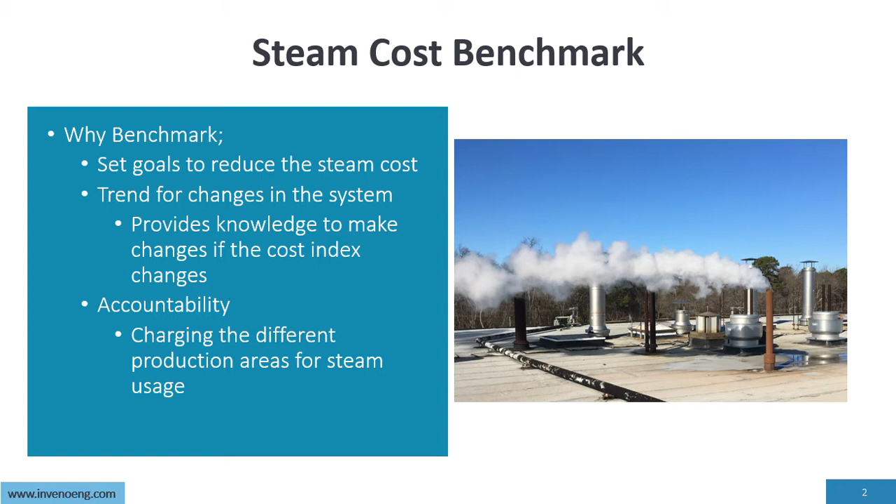Knowledge to all plant personnel. So it gives plant personnel knowledge. So if we go by this here venting to atmosphere, the plant personnel can put a cost to that. So this here is costing the plant roughly around $55,000 a year. But if we don't have a steam cost, then venting has no impact to the system.

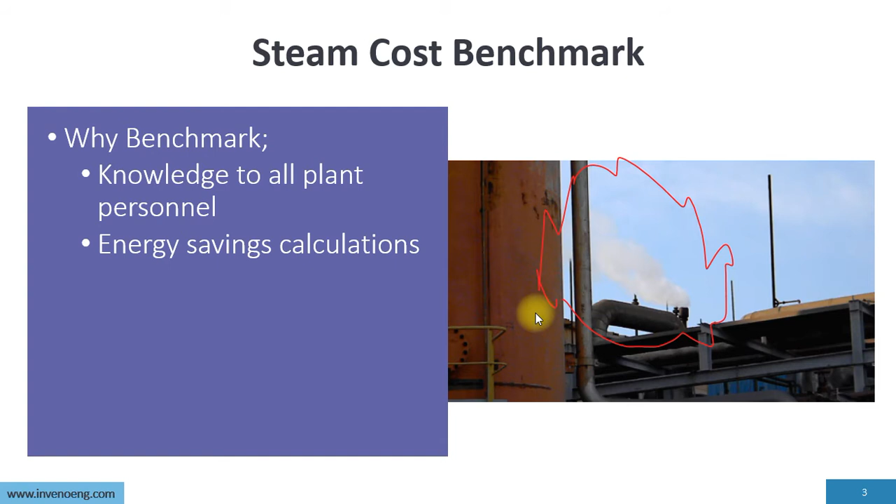And we need to understand energy saving calculations. So if we're going to implement and reduce the steam cost, what is the payback for that implementation? What affects the steam cost? Well, of course, fuel costs. If we get lower fuel costs, of course, it's going to provide a lower steam cost.

Operating steam pressure. Yeah, if we lower the steam pressure, it provides a lower steam cost, but it's not a significant amount, and we shouldn't be lowering steam pressure without looking at the boiler itself to make sure that we can lower the steam pressure without impacting the boiler operation. Also, we want to ensure the steam pressure is at the optimal steam pressure to meet the plant's process equipment.

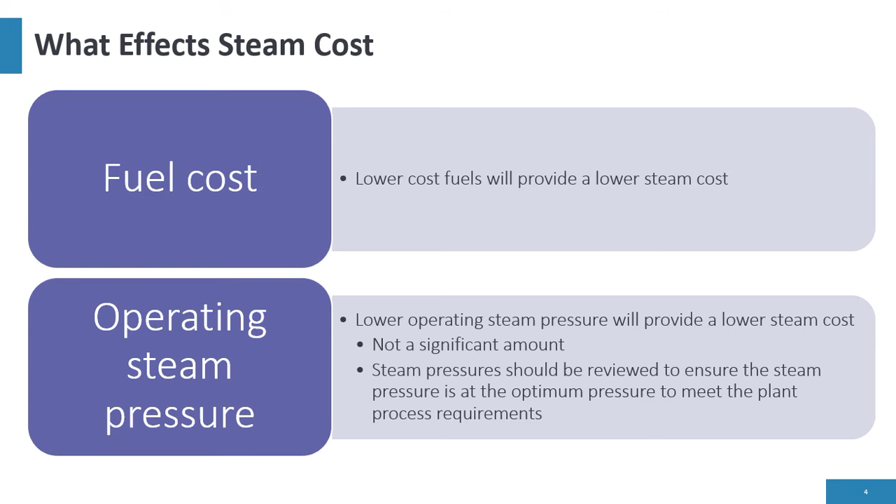Percentage of makeup or percentage of condensate return. The higher percentage of condensate return, the lower the steam cost. So if you bring back 95% condensate, your steam cost is going to be lower. If you bring back 10% condensate, your steam cost is going to be much higher.

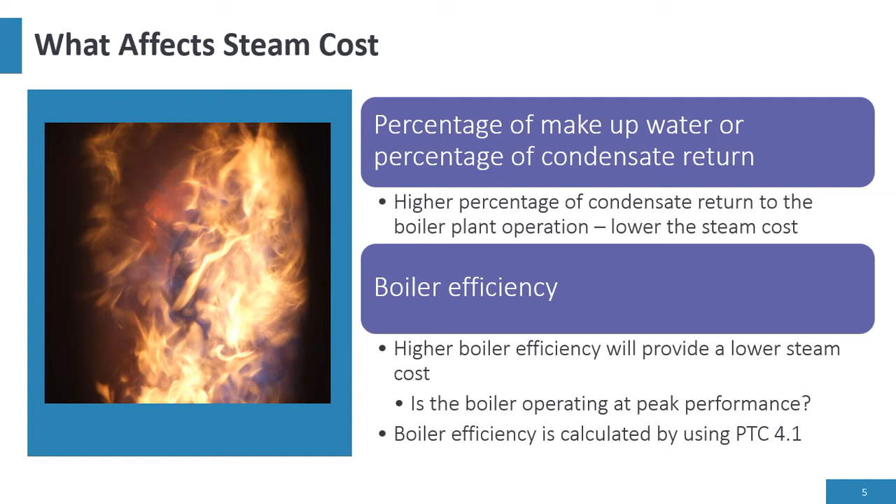The other thing is boiler efficiency. Higher boiler efficiency will provide a lower steam cost. Is the boiler operating at peak performance? Boiler efficiency is calculated per PTC 4.1. That's why it needs to have combustion testing of the boilers to make sure we're running at peak performance. And that should be done not once a year, it should be done every 3 months to make sure we're running at peak performance.

Loaded versus unloaded. When establishing a steam cost, it is important to determine the true cost of steam being used in a steam system. That's loaded cost. What is loaded steam cost and unloaded? Loaded steam cost has all operational costs, labor, capital projects, manpower, fuel costs, transportation, chemical costs, water costs, all the costs built into it.

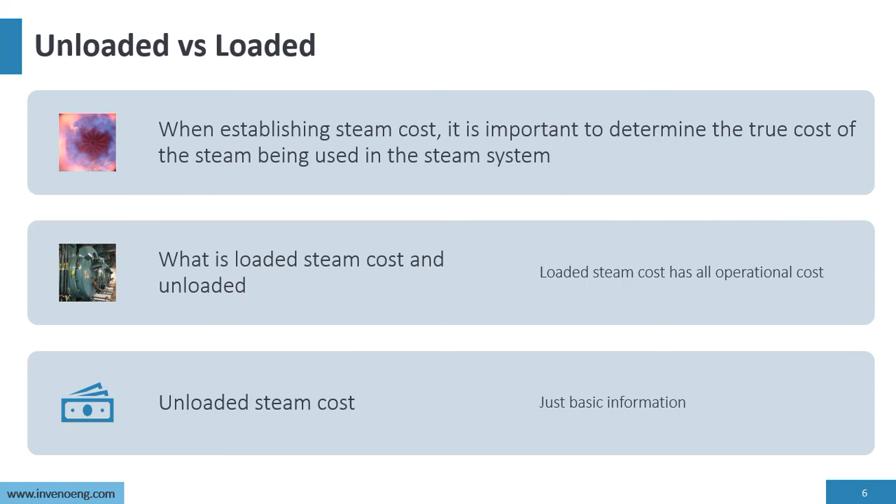Unloaded costs, just basic information, fuel input, the sensible energy from the deaerator, which we'll talk about. Basically, this is unloaded costs. SC is steam costs, AF is fuel costs in million BTUs, HG is the enthalpy of steam in BTU per pound, HF is the enthalpy of the boiler feed water in BTU per pound, ηB is the true boiler efficiency per ASME PTC 4.1 in a percentage.

The unloaded cost is basically a comparison of how much steam was produced and the cost of fuel. A basic equation: the difference of the steam being generated by the boiler and the feed water sensible energy coming into it, and the boiler efficiency.

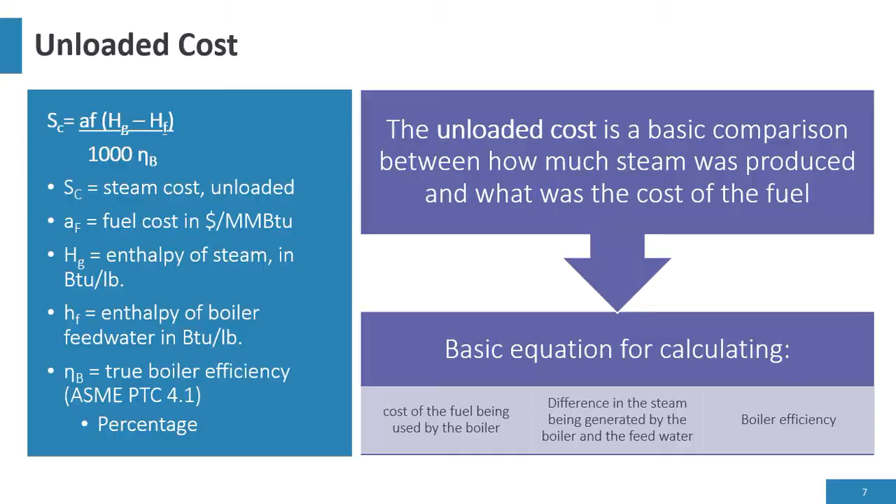An example of that would be just here is the monitoring point. So we have the sensible energy coming from the deaerator going into the boiler, efficiency, cost of the fuel, and the total energy leaving the boiler. So just a basic calculation. So example,

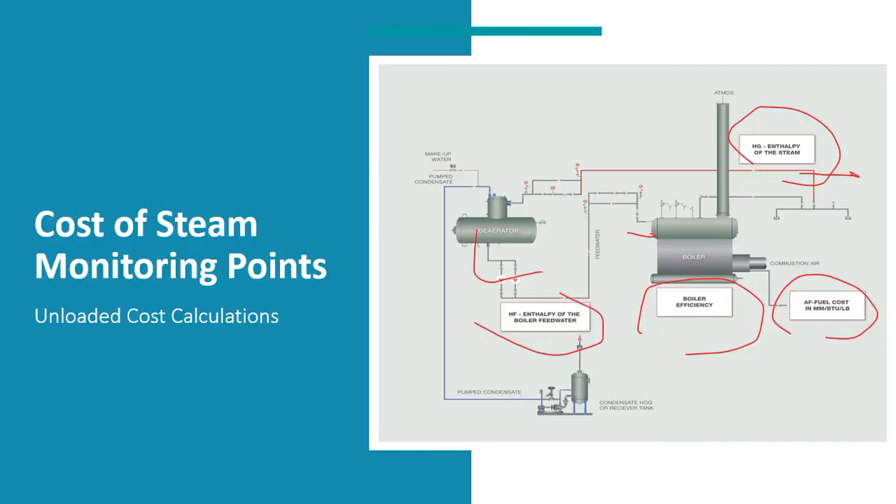if the boiler is generating steam at 250 psi, 240 psi, which is right here at the boiler outlet, the deaerator is operating at 15 psi, and the fuel cost is $4.50. The total energy is 1,201.8 BTU per pound. That is at the steam output total energy. The deaerator is operating at 15 psi, so that's 218 BTU per pound sensible energy.

And you divide by 1,000 and you divide by 0.79, which is the boiler efficiency. And you come up with a steam cost of $5.60 per 1,000 pounds.

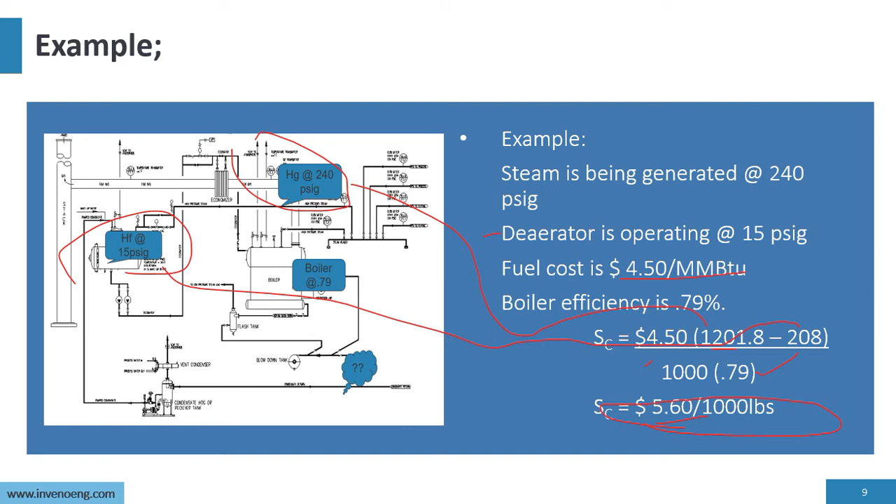Now, adjusting the fuel air ratio, making the boiler more efficient. So if we do that, we're still at $4.50, 79%, and our steam cost is $5.60. But I adjust the burner, the fuel air ratio, and I get the boiler efficiency up to 84%, and that will reduce my steam cost down to $5.27.

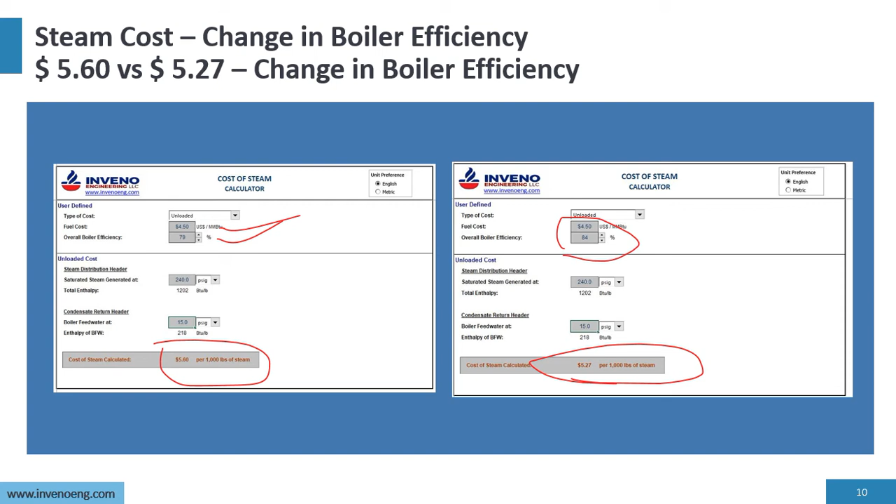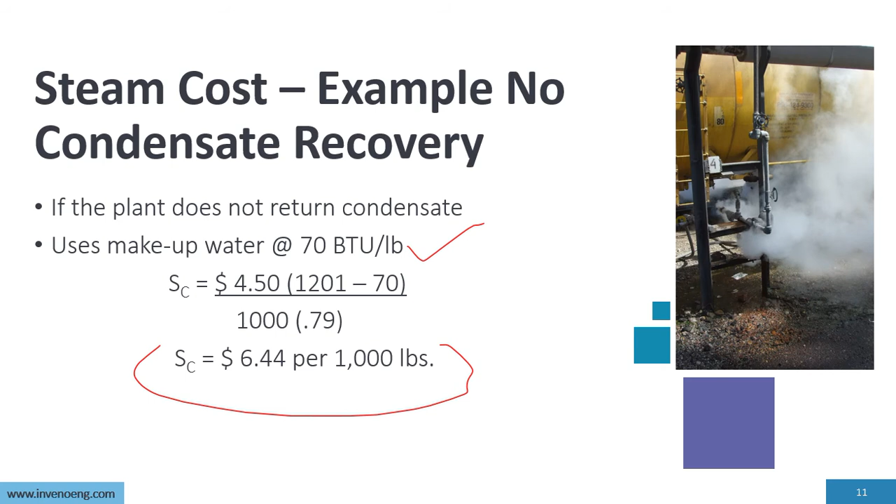So my point is the boiler should be checked for combustion efficiency at least every 6 months, or really every 3 months. But steam cost with no condensate being recovered, so we're not bringing back any condensate, will go up to $6.44 per 1,000 pounds of steam. That's makeup water at 70 BTU per pound versus the deaerator. So it's very critical that we bring back all condensate. It really impacts the steam cost.

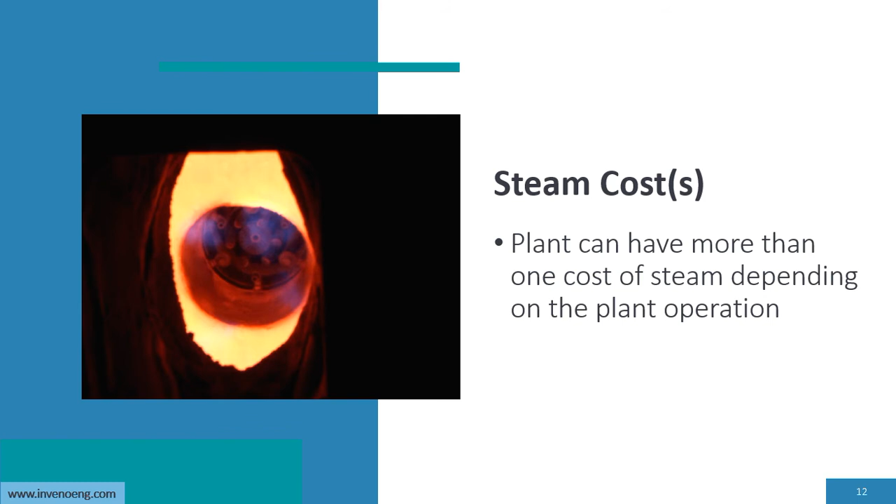The other thing is steam costs. You can have more than one steam cost. There are plants that are burning fuel in heat recovery boilers, and we're producing steam which is going to have much lower costs. Some plants I deal with have 5 different steam costs, depending on where the steam's coming from.

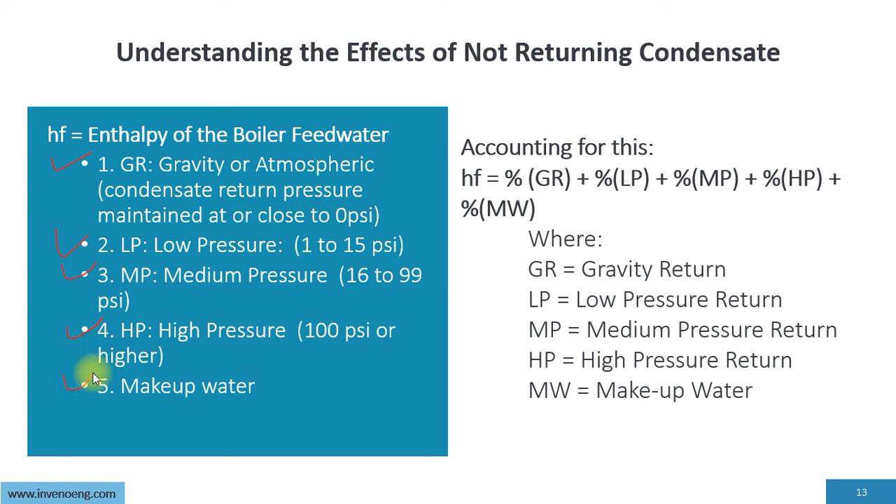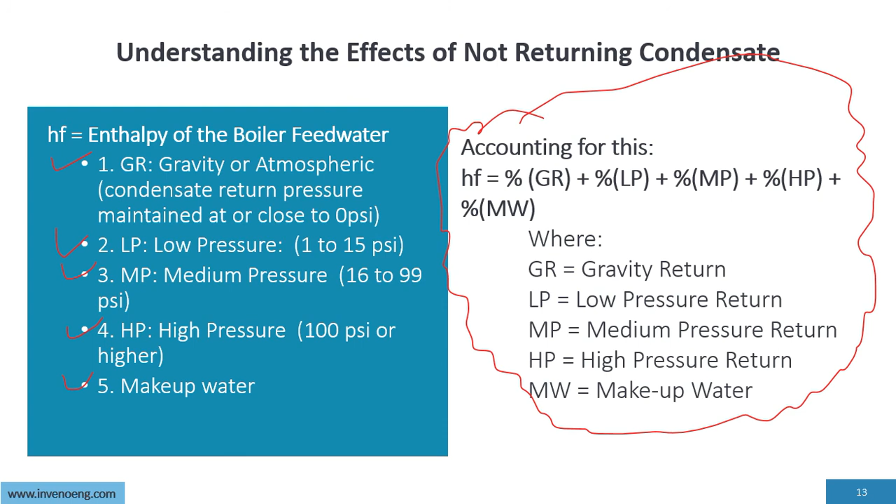So the other thing is understanding the effects of not returning condensate. We have gravity, low pressure, medium pressure, high pressure, and the makeup water. So we can account for all these variables of bringing back different condensate in this equation here. So we don't just have one number, we can have multiple numbers, and that will help you come up with a much better understanding of the steam cost.

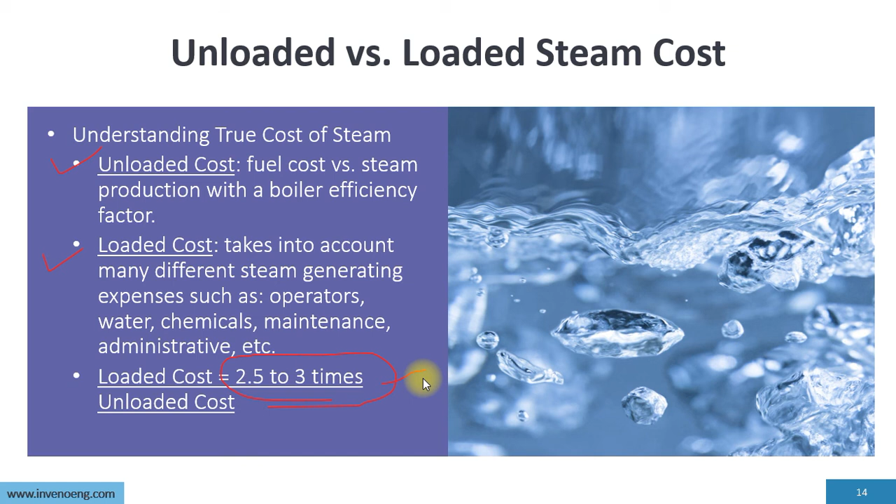We talked about unloaded, which was the basic equation that we just went through. Loaded takes in many different generating expenses: operators, water, chemicals, maintenance, administration, etc. Loaded cost is usually 2.5 to 3 times unloaded. So if you figure out you have unloaded at $5 per 1,000 pounds, loaded could be $15 per 1,000 pounds.

So optimization, what happens on Monday? We need to calculate the steam costs and be able to provide that to the plant for their knowledge.